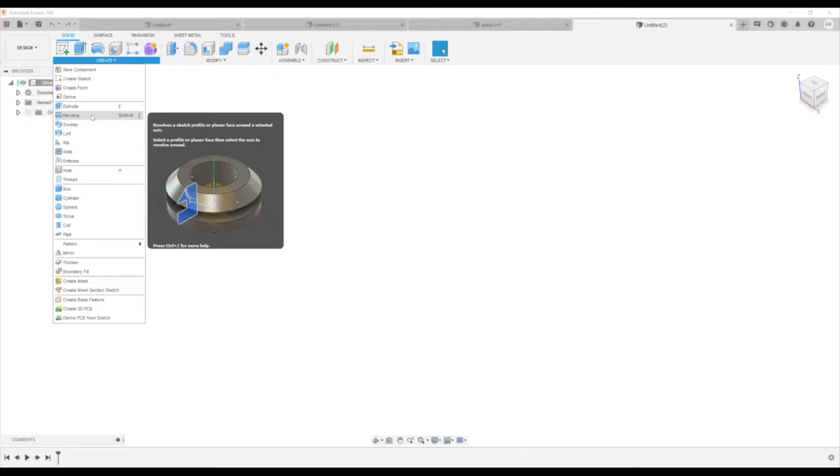Right. So the first principle of stuff for a glider, right? So you're all making gliders. So the first principle is that you're probably going to need to use the lofting tool. So we're going to spend a lot of time on the lofting tool today. And I'll start out real basic. So in my workshops so far, if you've been to them, we've probably done extrudes, revolves, and maybe just those two. Maybe we've done a sweep, but I don't think we've done a loft yet.

And a loft is a pretty unique tool, and it's meant to be used when you can't get the form you want from basic tools like extrude and revolve. So let me show you quickly how it works. So the quintessential case for a loft is when you want to make a circle that turns into a square. So I'm going to show you that right now. So we're going to make a circle. And I'm not going to do dimensions just because it's for demonstration here.

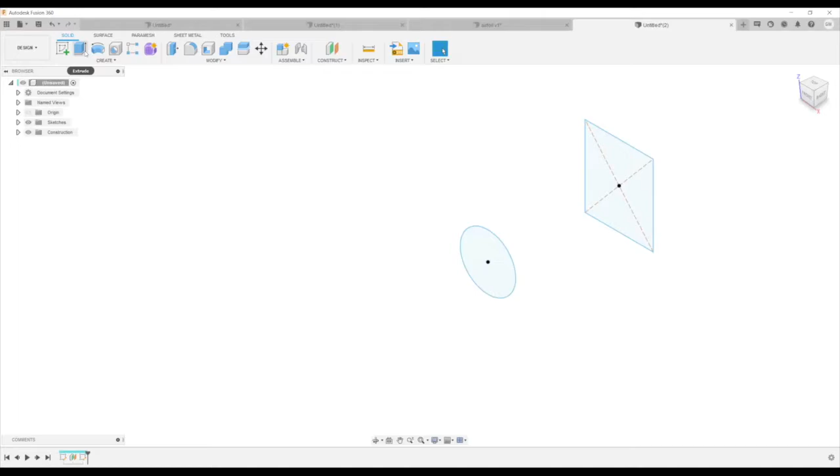I'm going to make a construction plane that's farther out here. And then I'm going to make a sketch on that new plane. And I'm going to make a square, or rectangle-ish. Seems good. So if I wanted to basically make a form that starts as a circle and merges into a square, extrude would not work, revolve would not work, and sweep would not work. Because sweep takes a constant profile and sweeps it along a path. Think of making a pipe or something. So it doesn't change form.

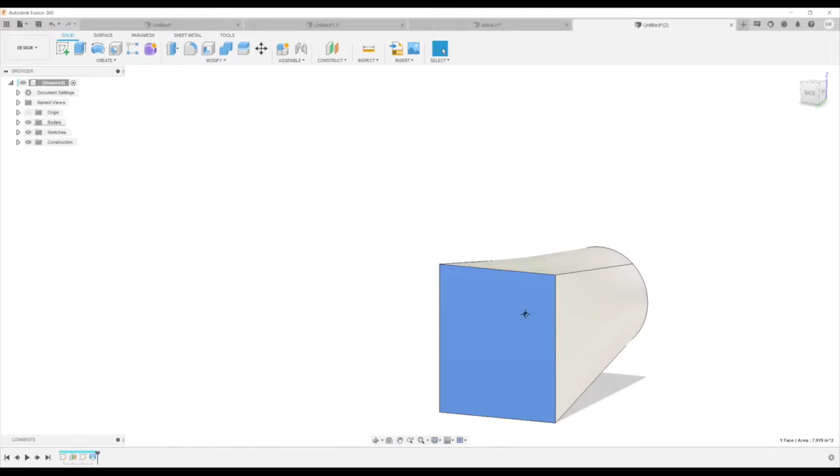Loft is the only one that allows the form itself to change as it goes through different profiles. So we're going to click on the loft here, click on the two profiles, and it's going to connect them with a solid body. So this is the classic example of a loft, right? You're having a circle that turns into a square profile. And this is really a great use case for a loft. So you can think of a loft as the tool you'd want to use whenever you are bridging together multiple profiles that are different.

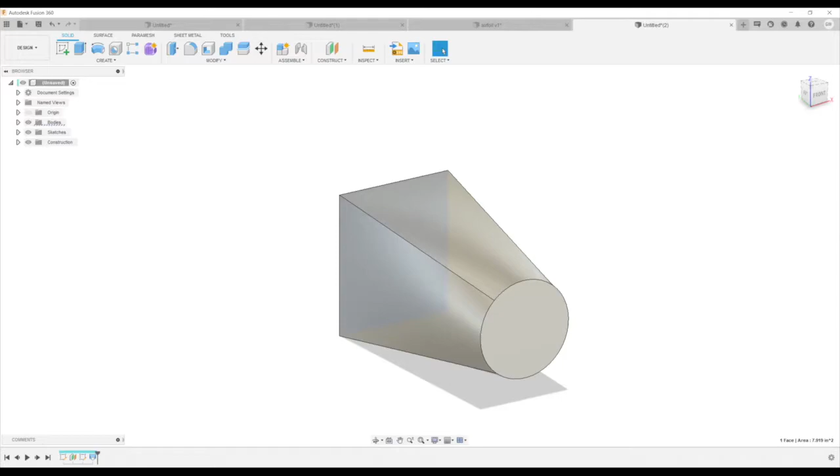So if you have a profile that's consistent throughout, then an extrude will be fine, or even a sweep. But if the profile is changing, you'll want to use a loft. And if you think about an airfoil or a plane wing, right? Those profiles change as you go down the wing or across the profile. So loft is really the best tool for that job. And we're going to go through how to do that today. But just from a very basic high level, this is what a loft does. And I'm going to show you another example here.

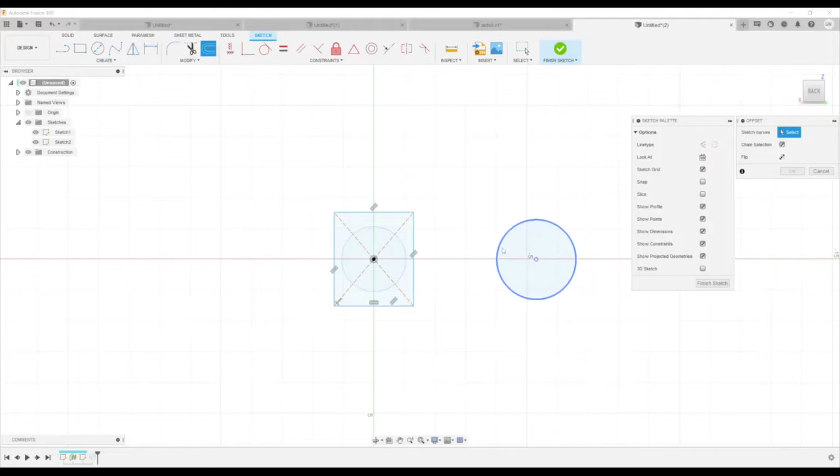So let's go back. Let's make a different sketch. I'm going to leave that one there, but I'm going to make another circle out here just to show you a different example. And then we can go and edit our second sketch. I'm going to take this and I'm going to offset it. Oh, sorry. First I have to project it. So I'm going to project it into my current sketch. And now I'm going to modify, offset. So I'm going to take the same one and maybe make it smaller or bigger. And just like that, I can get out and do a loft now between those two.

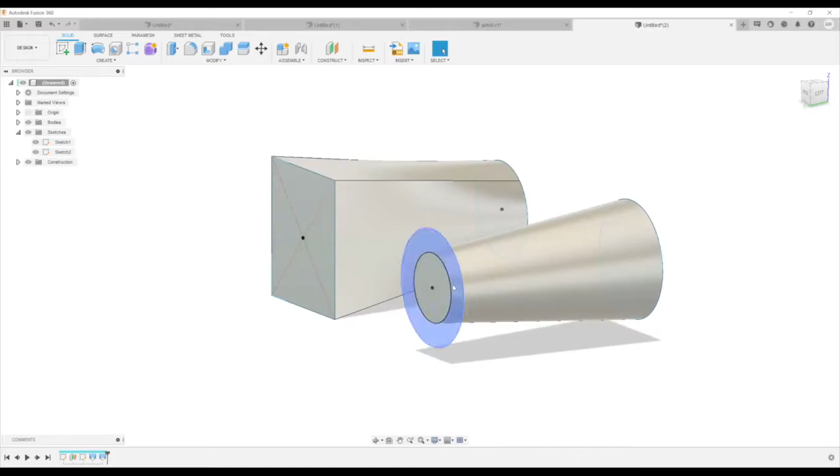So I start with this sketch and I'm going to go to this smaller sketch. And the cool thing about this is that this is now an offset from this main sketch. So I can pull this out, it's going to update, and it's going to keep that offset constant. So if I make this smaller, the offset is going to stay constant and change as a result of this sketch, since I projected it off this sketch. So this is another way you can use loft. If you want it to go from one diameter to another diameter, and you need to specify those two diameters and also the distance between them, loft is a really great tool for that.

Okay, I'm going to do one more example here. So we'll keep going to the side. So that's with a spline. I don't know if we've used splines much in my workshops, but a spline is probably the least parametric tool in the parametric sketching workspace. When I say parametric, I mean that it can be controlled by equations, by dimensions. And splines are a sketch tool, but they're really hard to control with dimensions.

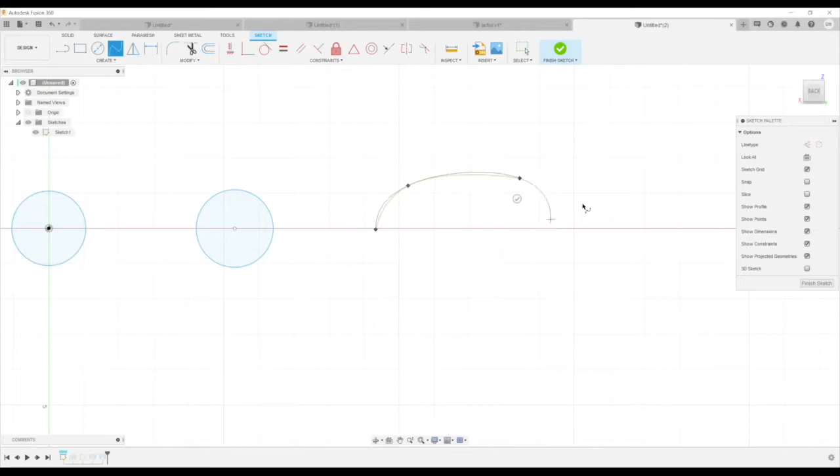You can see I'm making just kind of a free form thing. Right? And anything I do here can move. So I can pull this up, I can pull it down. If I click on any of these points, there's this green line, that's the tangency control. So I can make it more tangent. I can bring this out to expand the tangency. So you can see why these are hard to dimension, right? They're sort of meant to be more freeform. So I'm not going to dimension it right now.

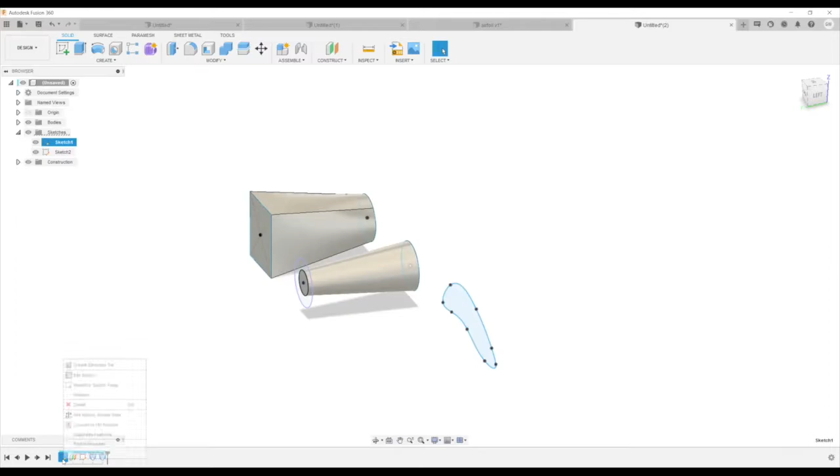But I just want to show you this is another kind of form that can be lofted. Before I was doing two planes, right? So I made another plane out here, but I want to show you that you can also just copy. So I'm doing Control C, and now Control V. Oops, my bad, sorry, I have to be inside the sketch. So if I click this and I do Control C and then Control V, you'll see how it brings up the move copy dialog. And now I have a second one here, and I can move this off the plane.

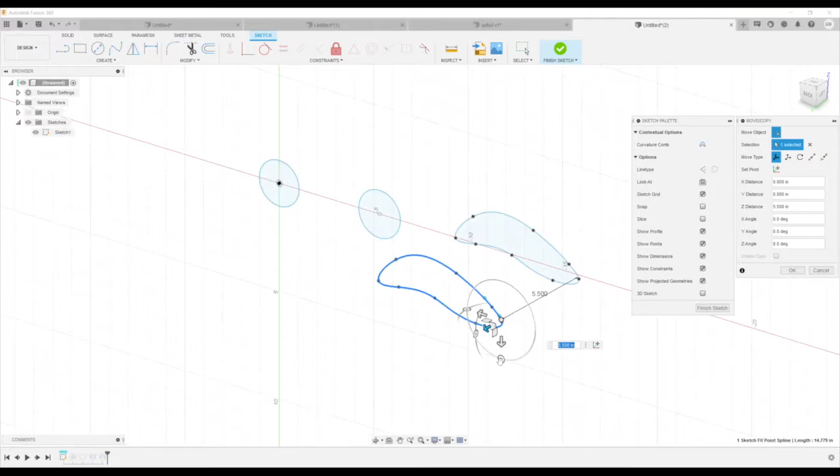So what I did there is I basically made a 3D sketch. I copied and pasted and I moved it off of the plane. And once I'm here, maybe I want to rotate it a little bit to give it a bigger angle of attack. And then what I could even do here is scale it. So I can scale it maybe from the top. I can do like 0.8, so I can make it a little smaller. I could have also done an offset.

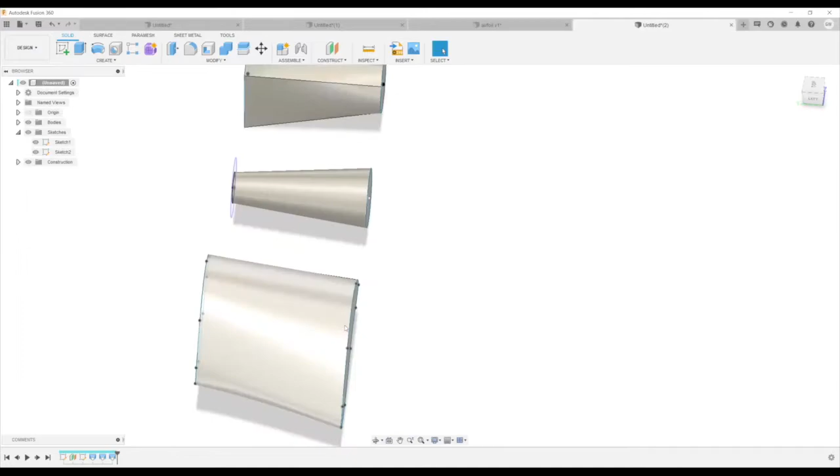And then here I can do another loft. Loft. I'm clicking there. And there I get this kind of interesting shape, right? Because I rotated it's a little bit different. It's smaller. So these are three examples of a loft, three different ways to do sketches, right? The big difference is the first two, I made a new plane and I sketched on that new plane. And this third one, I pulled the sketch itself into space to make a 3D sketch. And then I used those two profiles that were actually in the same sketch.

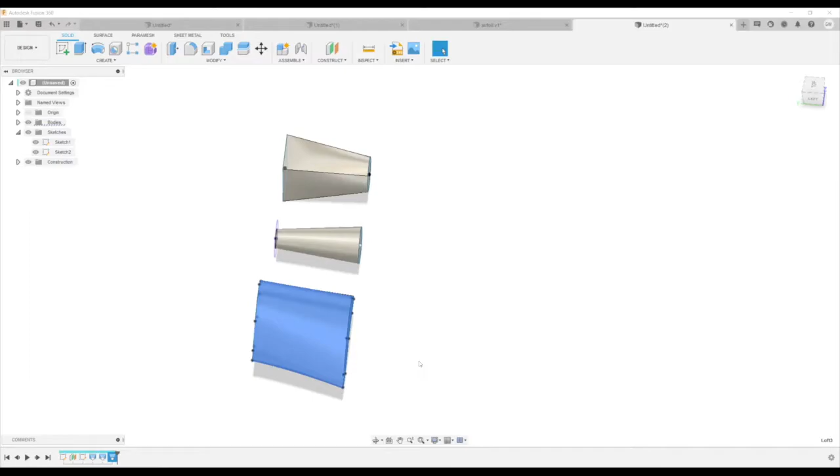So that's the basics of solid loft, and then from there you can do things like fillet. If I click the fillet command, I can fillet these edges. Oops, too big. Let's do 0.5. So I could fillet an edge. You can cut a hole in it. You can do any other tools that you want to use in terms of the solids.

Now, I'm going to hide those bodies and I'm going to show you something else. So we have our three examples of lofted profiles, and we're going to go into the surface tab. This is another area that I don't think we've really talked about yet. The surface workspace is also parametric, meaning that it's driven by equations. But instead of making solids, you're making surfaces. And surfaces are exactly what they sound like, right? You're not making a solid body, you're just making the external faces of it.

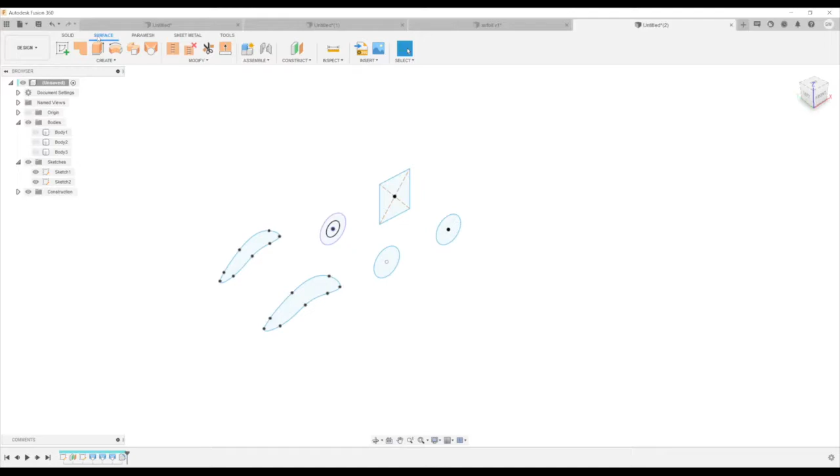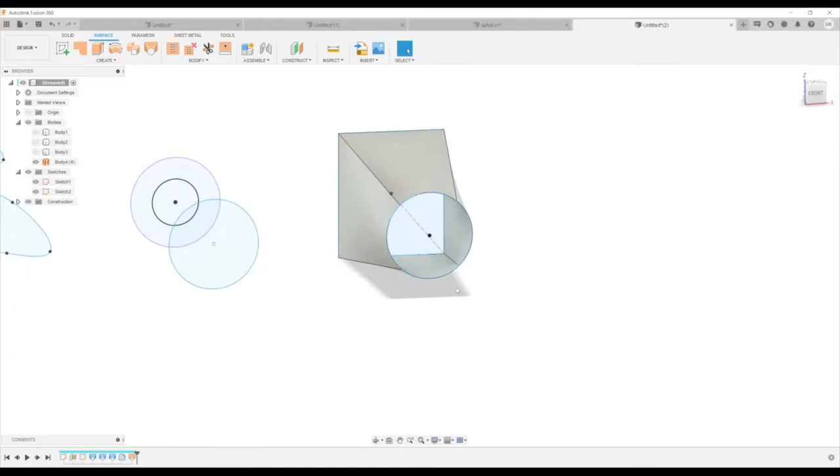So we can see if we do the same loft, let's start with the first one here. I'm just going to select the edge. I don't need it to be a closed profile because I'm just doing the surfaces. So if I hit OK here, you'll see it's actually hollow. I'm going to hide the sketches for a second, right? It's actually a hollow shape. And that is pretty different.

So if we show that first surface body, I'm going to move them actually. I'm going to move the surface body just a little bit over, just so we can see both of them together.

So it's pretty clear what the difference is here, right? We can see one is just a surface and one is just a solid. And there are some real benefits to using both kinds of paradigms, like using a solid modeling paradigm or using a surface modeling paradigm. For airfoils, I tend to gravitate towards surfaces because you can control things a little bit finer.

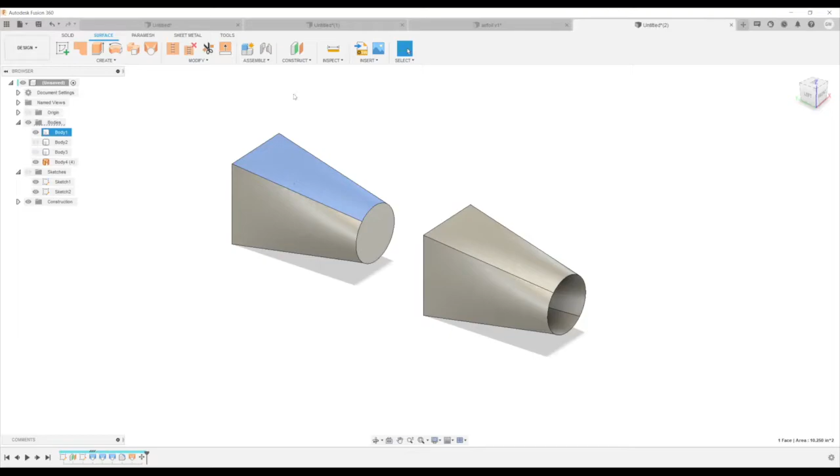For example, let's say I wanted to get rid of this face on a solid and make that face something else. That's kind of hard to do. I'd have to make the thing I wanted this face to be first, and then it would transform into that. So maybe I would extrude this to be taller. But on a surface, I can literally just click the delete button, and it's going to delete just that surface. And then I can reform that surface.

For example, I could do another loft here and just loft from this edge to this edge. And now I'm reforming that surface. So that's the usefulness of surfaces: you can treat each face as independent and modify them with a lot more control because you don't have to worry about editing the whole body at once.

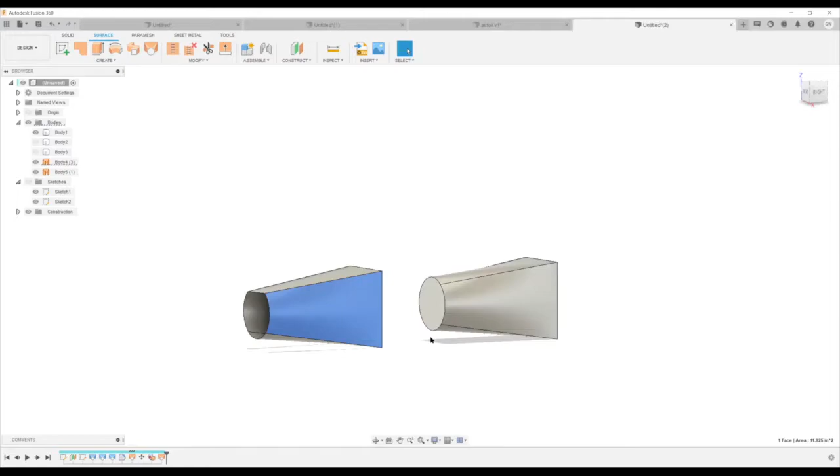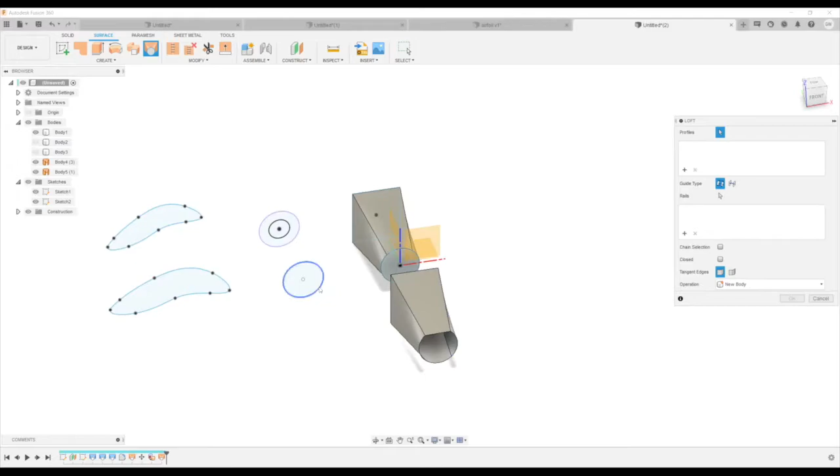Okay, I know there's some questions, but I'm going to finish this section of the demo and then I'll get to the questions. I'm just going to do another surface loft of each of these just to show you. Whoops. Cool. And then one more here.

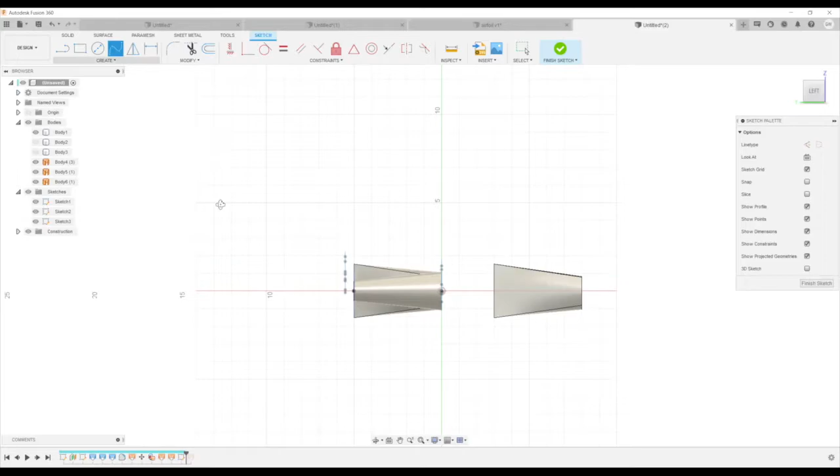The same idea. A couple of things about these lofts that we haven't talked about yet: the main one is called a guide curve. If we go back before this last loft, we can see that if we just do a straight loft, it's going to make the shortest distance between the two curves. Let's say I wanted to follow a different path. I'm going to make a sketch. It doesn't really matter what plane I pick.

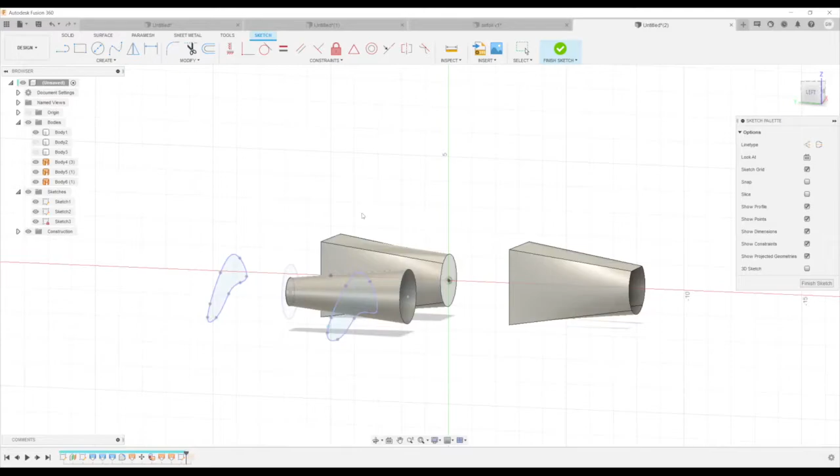I'm going to click on both of these, go under Create, Project/Include, and hit Include 3D Geometry. That pulls those 3D objects into my current sketch. If we hide the original sketch, we can see they are in my current sketch, sketch 3, as 3D objects. And now if I do a spline, my plane is actually back here, but as soon as I hover over these objects, I can snap to them. So right here, I'm snapped to it.

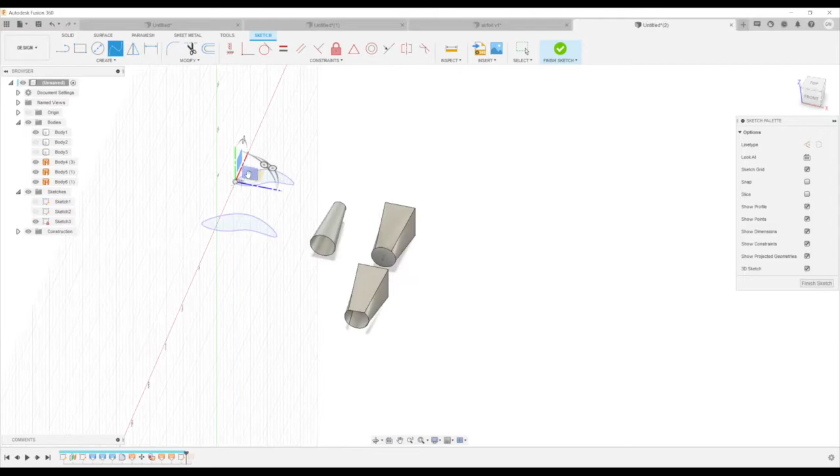Maybe I'm going to do a 3D sketch here. So I clicked 3D sketch on the side. I'm going to click over here, and then I can click on these planes to tell my mouse where it's moving in 3D space. When I clicked on this top plane, my pointer is in this top plane, so if we go this way, it's stuck on that top plane. If I click on a different plane, now it can move on this front plane. So that's the way to control 3D sketches.

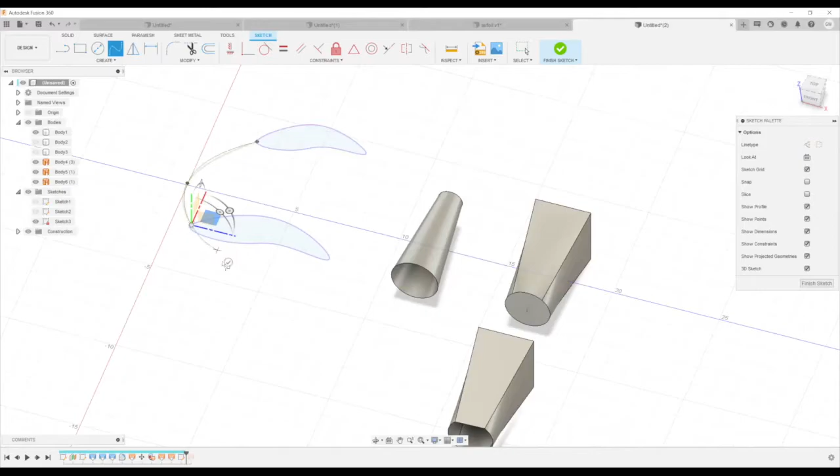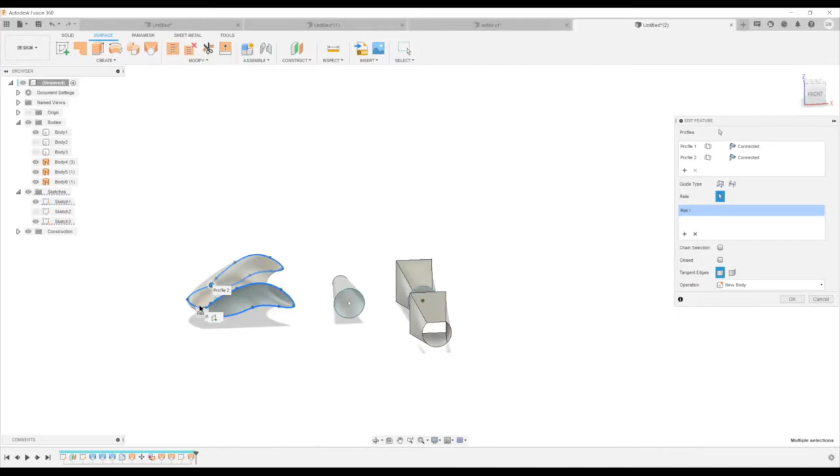But I just want to keep it simple here. I'm going to now anchor it to this other part. So I'll show you what I did: I just made a 3D sketch that connects the two right there, and we call that a guide curve. Now if we go back to that loft and click edit, we're going to add a rail. I add that rail, and you'll see how the form changes. The rail pulled the loft to one side.

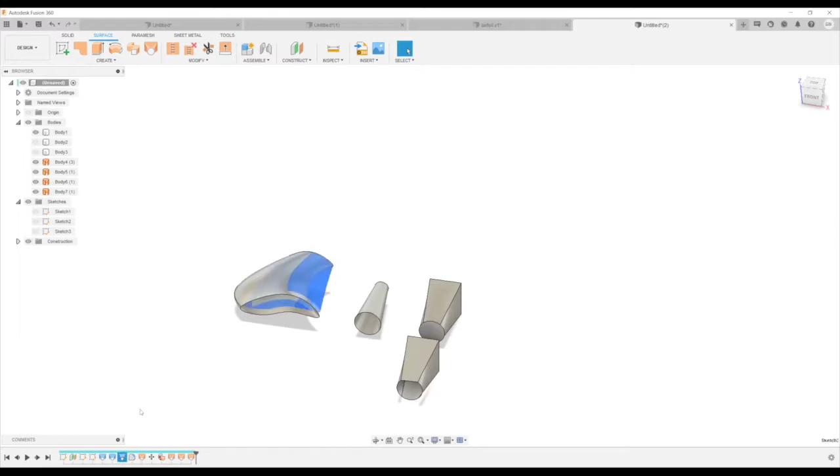So that's how rails work, and you can have multiple rails. If I wanted that on the other side as well, I would have it bulging on both sides. Rails can really pull your form one way or the other. And you can do rails with solids as well as surfaces. Let me pull this sketch to before. Now if I edit this solid, I can also add a rail, and it does the same thing. Now I have the solid with a rail. So rails are pretty useful.

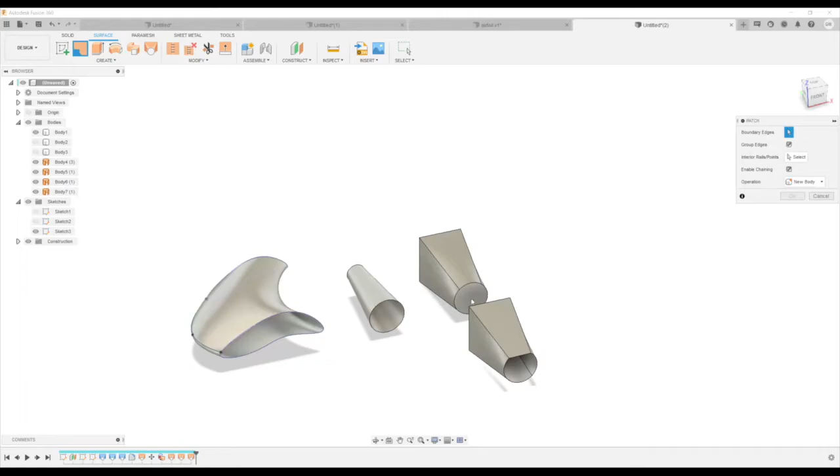Now with surfaces, all of these surface bodies, I can't do the fillet the same way, but I can use other tools. One I wanted to show you is the patch tool. What a patch does is it takes a chain, an edge, and puts a patch on it. You can see it just makes a flat surface there. So there's one patch.

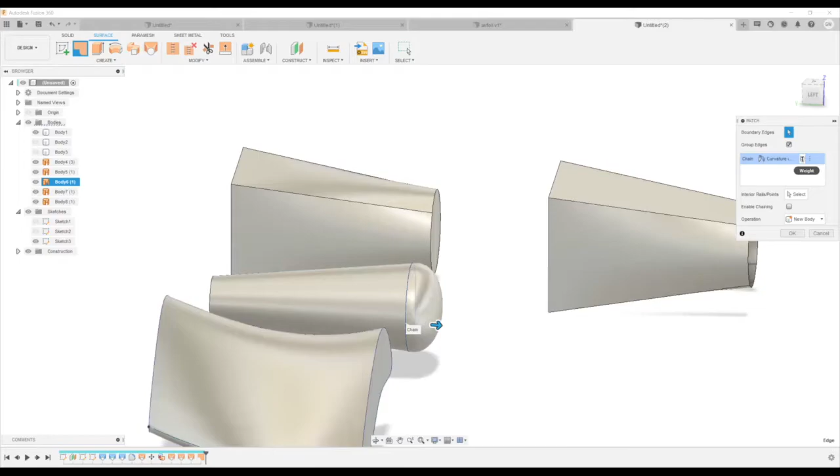And if I do the same thing here, this one, it's on a conical surface, and you can see I can make it a connected patch, which is flat. I could also make it tangent, which will put it tangent to this surface. And I can also do a G2 curvature, and I define the weight of that. So maybe I want to make it 0.8, which will pull it out even more.

And then if I do that on both sides, so I'll just do another simple patch on this side. Now I actually have a surface, and then I made 2 more surfaces on the back. And I can actually stitch all of these together to make a solid. So that's the stitch command here.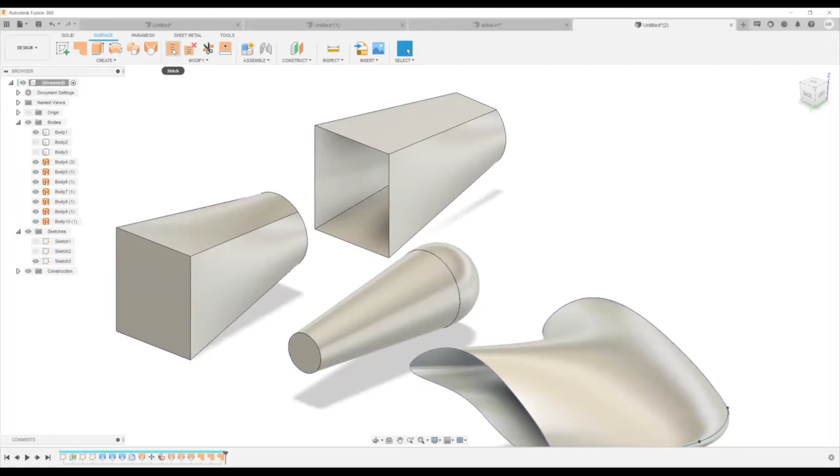So if I click these 3 surfaces, you'll notice there's a green line between them. And as soon as I hit OK, right, there's body 6, body 9, and body 10. It's going to form a solid body, which is body 11. So you can turn surfaces into solids by capping all of the open edges and then stitching them together.

And the same thing with a solid. I can take a solid and turn it into a surface by unstitching it. So this command called unstitch, if I select this body and I unstitch it, now it's a collection of different faces. And those are in your timeline as well, so you can delete them or go back or whatever. But that's how you would get from one to the other.

Yeah. So that's what I wanted to show you for kind of high level lofting. So I'm going to look at the questions now, and then we're going to go through a more long form example of an airfoil. Okay, so the first question is, how does one determine a cross-section shape of wing anyways?

Do you wing it? Haha, good one.

So that is a good question. Airfoils and ideal airfoils are usually determined through computational analysis. So like when I was an undergrad, I did it through a program called COMSOL. I think ANSYS can also do it. Autodesk CFD is another product that can do it, that kind of tests out these airfoils and tells you how to make them better.

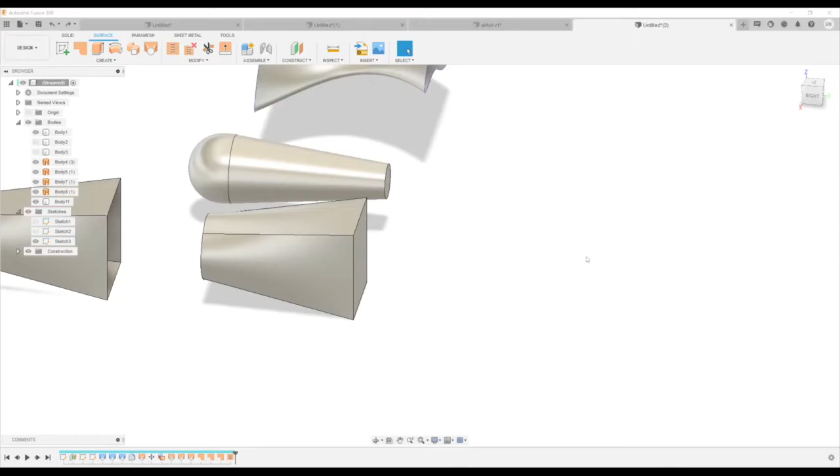Yeah, so there's a website called airfoiltools.com, and it basically gives you profiles of airfoils. So if you hit airfoil search, I'm just gonna search all of them. So you can see there's a ton of different ones. So like this one's kind of interesting. So if we just click the first one, it gives us a profile of the airfoil, and it gives us a bunch of

charts of the airfoil. So CL is coefficient of lift, I believe. And CD is coefficient of drag, and alpha is the angle of attack. So it's basically giving you plots of how it's performing. And then it also has some data up here. I'm not like an airfoil expert, so I'm not sure quite how to interpret it.

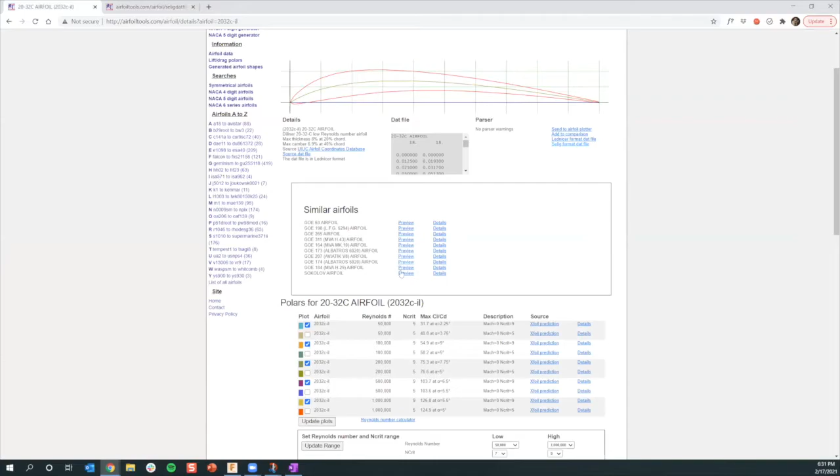But I do know that the DAT file is basically a list of coordinates of the plot of the airfoil. So it has a point at 1 and then 0016. And then from this data, Fusion can take it and make a sketch. So that's actually what we're gonna do next. But that's how you would figure out, if you didn't want to make your own airfoil, you can kind of search a database and get data for the airfoils that you want.

Okay, second question is, for surfaces, do we need to start from a solid body, or can we start using surfaces from scratch? You can certainly use surfaces from scratch. So when I made these surfaces, I actually didn't start with a solid. I started with sketches. So I lofted sketches into a surface body. So you do not need to start with a solid. You just need to start with a sketch. Same as anything.

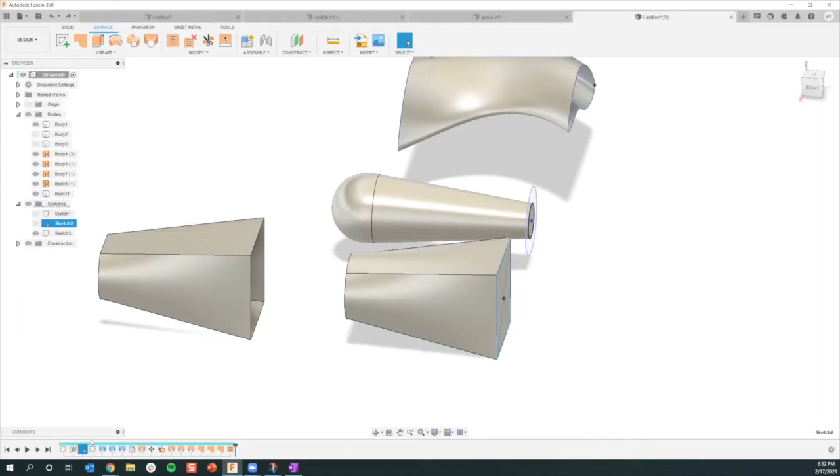Probably the easiest way to make a surface is you would just make a sketch. Let's see. Where's the origin? Yeah, so let's just make a sketch here. Doesn't really matter what that sketch is. There's my sketch. And then I can use the patch tool, and I just click patch. And now there's a surface that is that profile. So all you need to do is start with the sketch.

Okay, so I'm going to go through kind of a longer form example about making an airfoil. So we're going to utilize all of these things that we learned about lofts. I only showed you lofts with 2 profiles, but you can have a loft with 100 profiles. So we're going to go through that. When I made an airfoil today, when I prepped for this workshop, I basically started with a canvas. I've never really worked with airfoils or made airfoils, so I wanted a picture to know what I was going off of.

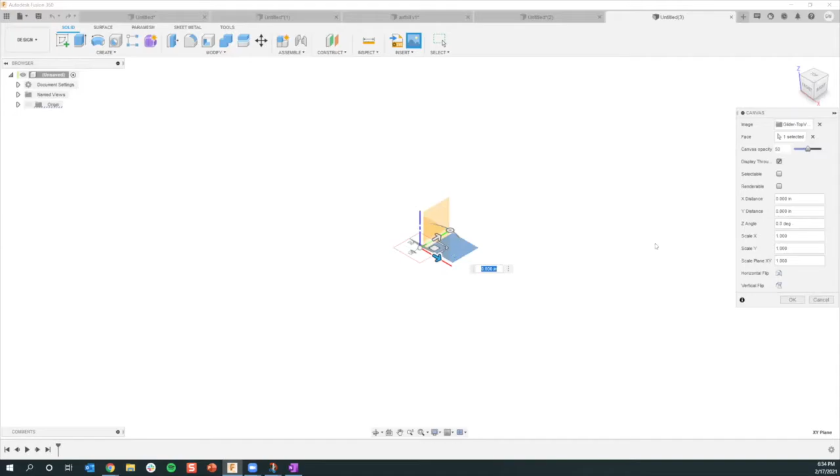So I did something called insert canvas. Under the insert menu, I hit canvas. And all this is just an image file. It's not a vector file. I can't use any of the lines on it. I can't use any of the images on it. It's literally just for reference. So I'm going to go on my computer. I have a folder called decals and canvases. Glider, top view. So I'm going to put it on the top, and I'm going to hit OK. You can see there's that glider, right?

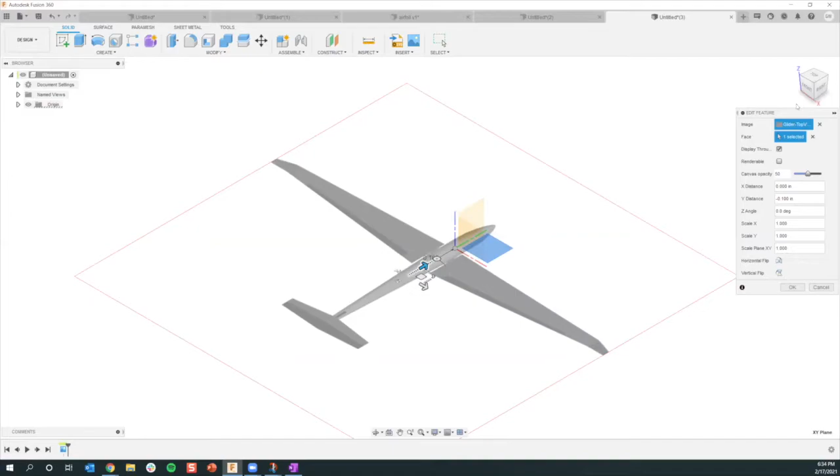Cool. So that's good. I think I want to move it a little bit. So I'm going to hit edit feature, and I'm just going to move it down so that the origin is kind of equivalent with the top of the wing here. And then the next thing I'm going to do is calibrate the canvas. Right now, this is pretty small. I can tell because I had to zoom in a lot to get to it.

So if I right click and I hit calibrate, what that's going to allow me to do is set a distance. So if I click here and I click here, do y'all know how big your gliders are going to be? What the size is generally? It's probably most likely going to be a volumetric size, that they'd have to be less than a liter in displaced fluid. Okay, a liter. So are we looking at a wingspan of like a foot? Sorry, I'm not in metric mode right now. I'd say like a third of a meter, maybe about 30 centimeters. Yeah. Okay, so let's say it's 30 centimeters.

And I'm actually going to round it up to, there we go. So now it's scaled. So now it's what we want. I'm gonna recalibrate it and just do the closest amount in inches just so my brain will function a little bit better. So I'm gonna say 12 inches. And now I want to move it one more time, so I get that origin where I want it. Okay, cool.

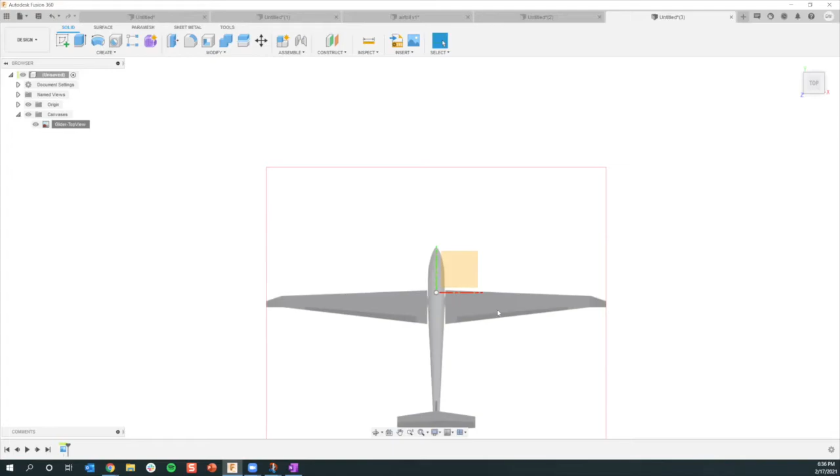So the next thing I want to do is draw the outline of the wing. So I'm going to make a sketch on the top plane here, and I'm going to make a bunch of lines. I'm only going to focus on one side, and then I'm just going to mirror the body. So I'm just going to do this side for now. Okay, so that's the outline. And I also want to do a couple more things here. So I want to dimension it first. So let's kind of do that.

What did I dimension on my other one? I dimensioned this bottom one. So I'm just kind of gonna round it. So maybe 1.2. And maybe I want the total length here. Oops, I want this to be horizontal. Why is it doing that? I want to make sure these are straight.

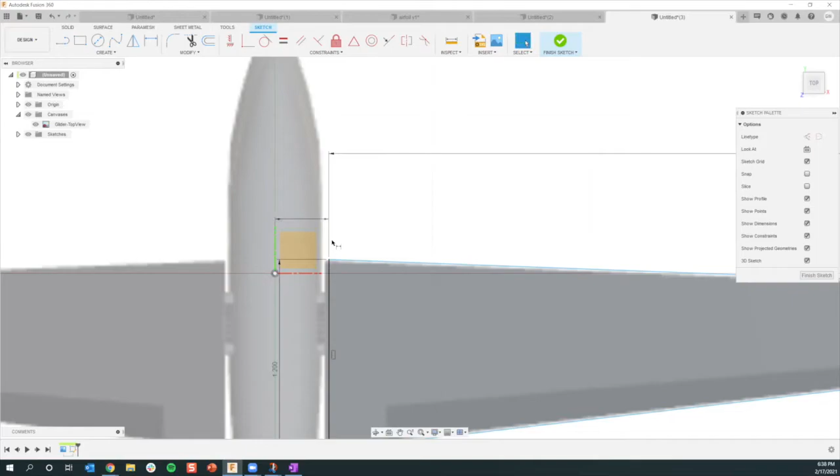Remember, the reason we dimension is because dimensioning shows design intent. So if someone else comes and looks at this, they know what I was trying to do. Also, sketches that are undefined can be moved very easily and then they can be broken. Okay, so that's pretty good.

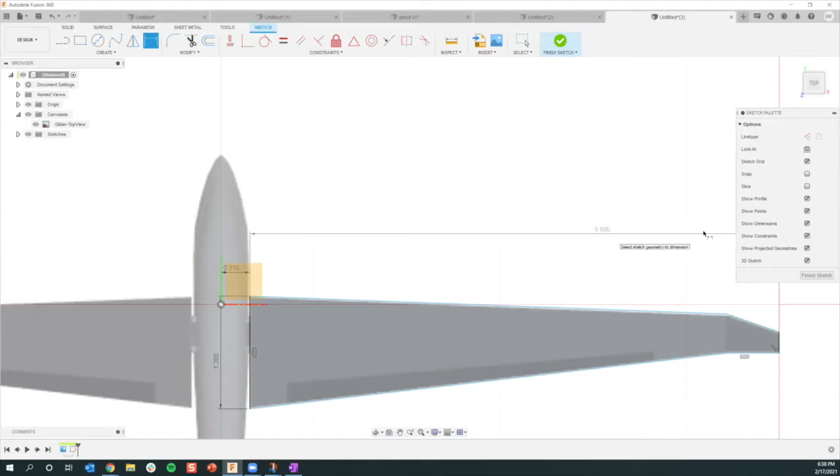I'm going to set a dimension here that's aligned. So an aligned dimension is at the same angle. So it's going to be 5.12. And then I'm going to make this the same as this.

Okay, that's good. And then I think the last thing I need to do is these angles. So I'm going to make that 163, maybe. And then I'm just doing this. I don't have these numbers written down or anything. I'm just doing this based on the image approximately.

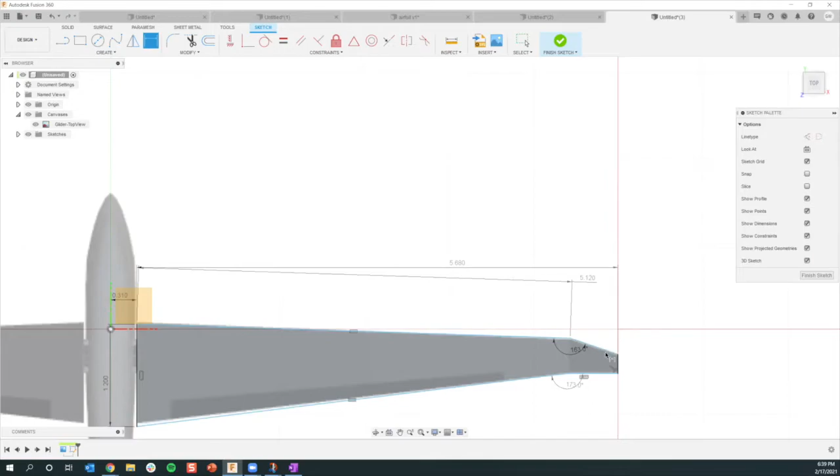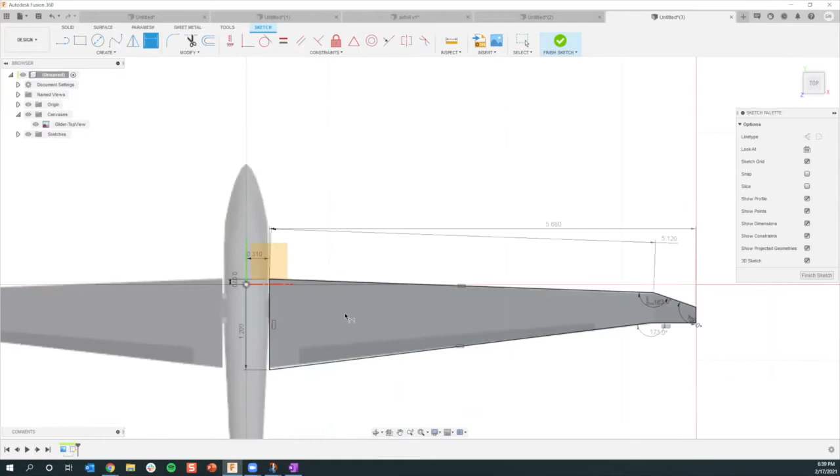Okay, so I'm not sure exactly how this is not dimensioned, but if I pull it, I'll find out. Okay, so I'm going to define it based on the origin here. I'm going to do 0.07. Okay, now it's fully defined. That's great.

So a couple other things I want to do here. We're going to loft this, right? So if I was doing an extrude, all I would need is this profile. But I'm going to loft it. So I essentially am going to want a profile at various points along this wing, so I can loft between them. And the points at which I want the profile, I'm going to define right now.

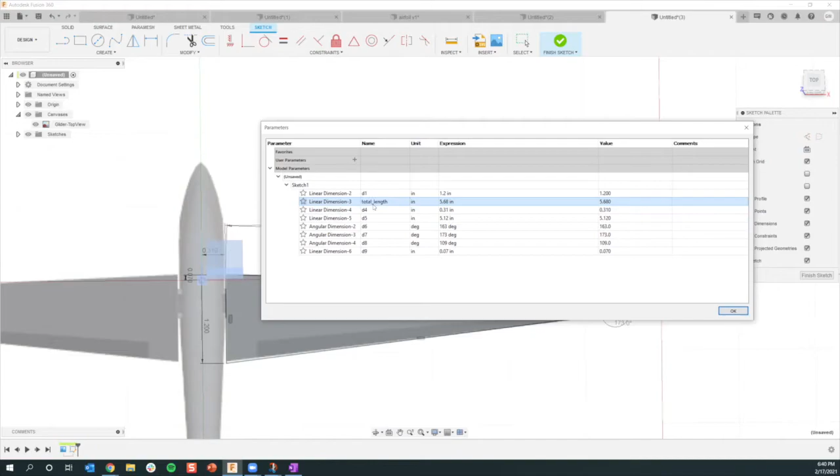So I'm going to do a rectangular pattern of this line. Okay, actually, before I do that, I'm going to find out what this is. So this 5.68, I want to find out what's the name of that dimension. So if I go under modify, change parameters, these are all the dimensions in this sketch. So this 5.68, I'm going to change that to be total length. Okay, so that's important, and I'll show you why.

So if I do create rectangular pattern, I'm going to rectangular pattern this sketch line at the bottom. And I'm going to do it in this direction, which is just perpendicular. And my extent is going to be, the extent is like the total length, and the distance of the extent is going to be total underscore length. So now it's going to end my rectangular pattern exactly at the end right here that matches this dimension. That way, if I change this dimension, the way that my planes are set up is also going to change.

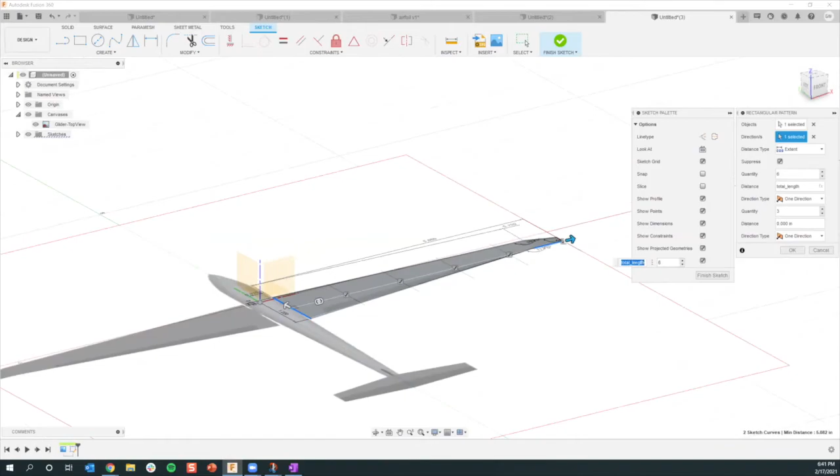And I maybe want, how many do I want here? 1, 2. If I was really doing it, like 10 is probably overkill. Maybe 6, I don't know. 1, 2, 3, 4, 5. Sure, maybe I'll do 7. But you can play around. The more planes you do, the more granular control you have, etc.

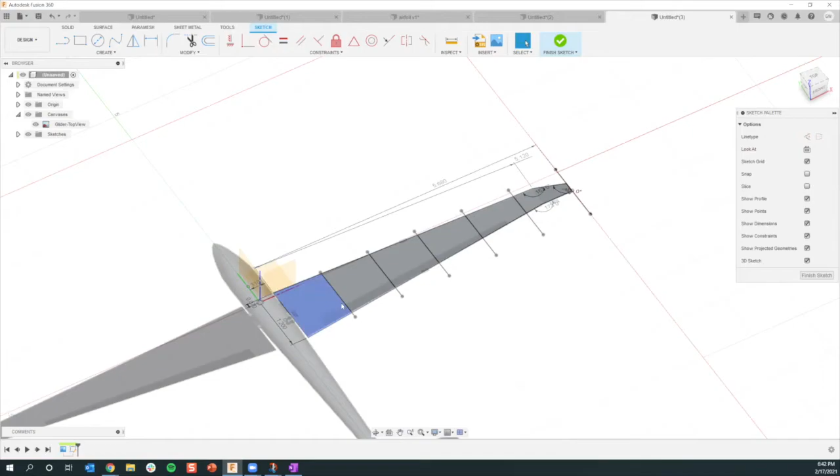So what it did is it made these lines evenly spaced. And what I'm now going to do is get out of my sketch and make those lines into planes. So I'm going to use those lines as reference points for planes.

So under construct, plane at angle, that's what we want. I'm going to click each of those lines, and I'm going to make a 90-degree plane at that line. So I'm going to do that. And if I right click, I can just go up and repeat the last command. So right click, the thing at 12 o'clock is my last command, 90. So I have all my planes now.

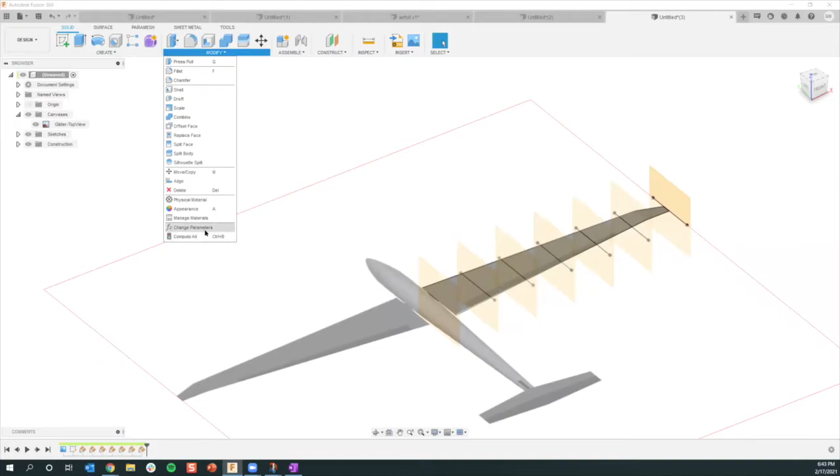That was fairly quick. And I want to show you just the reason we made this parametric. So if we go back to our parameters box, we have that total length, right? 5.68. Let's look at it from this way. If we change that, okay, let's make it crazy for a second.

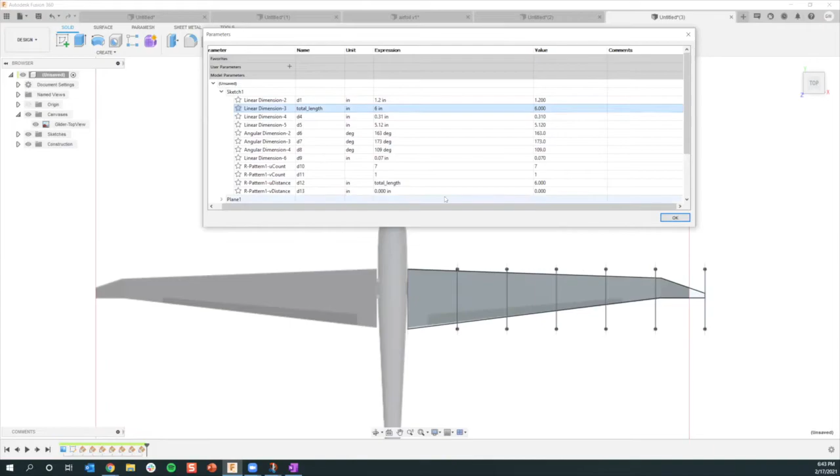If we change that to 7, oh, 7's a little too crazy. Let's change it to 6. If we change it to 6, you'll notice that those planes still are spaced evenly, right? Because we made the planes tied to the lines, and then the lines were equally divided with the total length, right? So it's all parametric. It's all linked back to this total length. We have a lot of control over this, and it's not going to make us redefine anything.

So that's pretty nice. All right, so we have our planes, and now we're going to bring in that airfoil. So let's go back to that. Which one is it? I think it's this one. So we're at this airfoil profile.

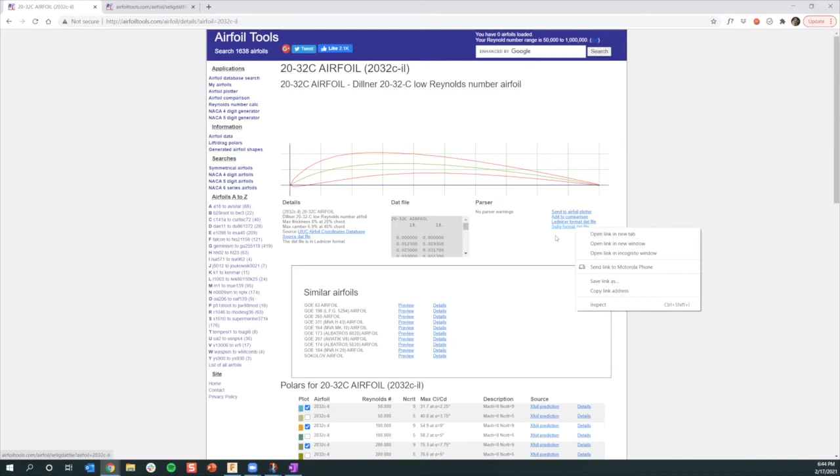So I'm going to right click on this DAT file, and I'm just going to click on it. And then we have this coordinates. So I'm going to right click and hit save as. And I'm going to save this as, I have a point clouds profile now, and I'm going to call this 20-32 C. And then, yeah, I think that's what I want to call it.

Or I'm gonna call it - sorry, my nomenclature here is airfoil and then 20-32C, and then the important part is .dat at the end. I hit save, and then it downloads.

And then we go into Fusion, and I'm gonna use an add-in that I created. So under your tools, you have an add-in, scripts and add-ins.

What I did was I went to the App Store and downloaded this one called Airfoil DAT to Spline 2.0. If I wanted to go to the App Store, let's see if I can do that - so y'all probably don't have that. If you just go under Fusion App Store, add-ins, Fusion App Store, it'll bring you to the App Store and you could search for this app.

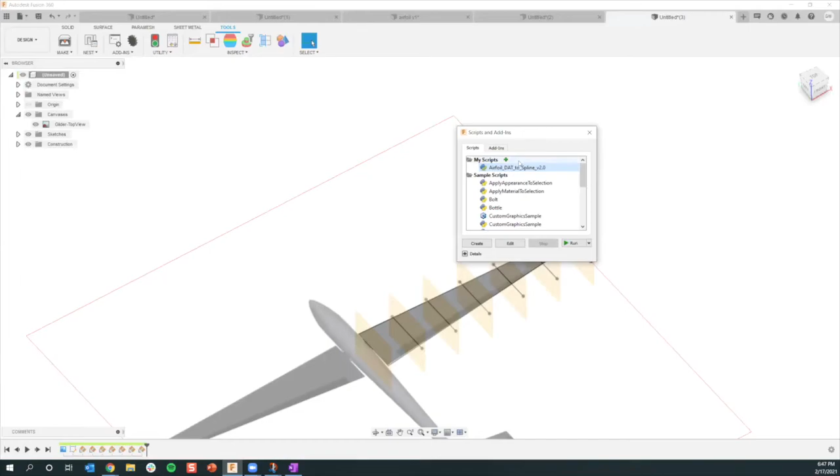Okay, so I'm going to run this script and I'm going to select a construction plane. It needs these planes because that's where we're going to put the sketches. So I'm going to put a construction plane, and I'm going to select a construction plane for this sketch.

And then on the chord is the length of the airfoil from front to back. So you'll see if I select chord, I hit these 3 dots and I'm going to say measure, and I'm going to click this edge to measure. And it gives me that's 1.2 inches. That's great, so it's going to give me that length, and that's going to be the chord of the airfoil it's going to import - it's going to scale the airfoil to have a chord length of 1.2.

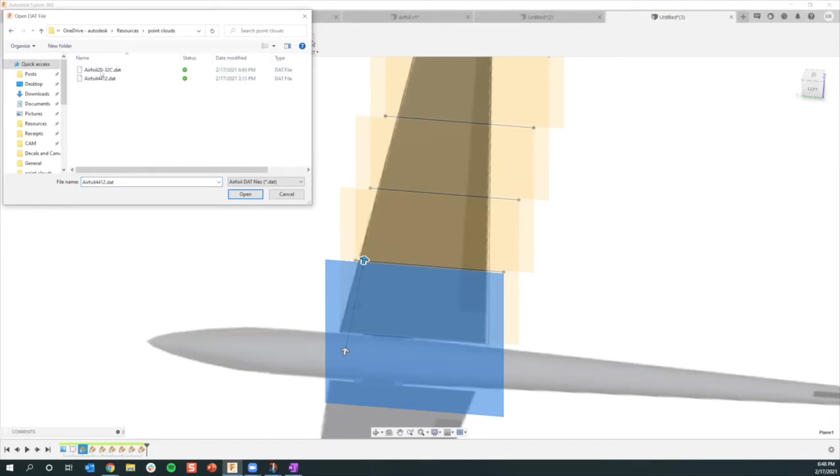Then I hit OK, and I'm going to go and find that airfoil. So that's under point clouds, airfoil 20-32. Okay, cool, so now the airfoil came into Fusion.

It came in a little bit of the wrong place, though. That's okay, so we're going to click on it, go into our solid workspace and hit move. I'm going to do a couple things - the first thing I'm going to do is rotate it about this, I showed the origin here, and I'm going to rotate it about the x-axis, 180 degrees.

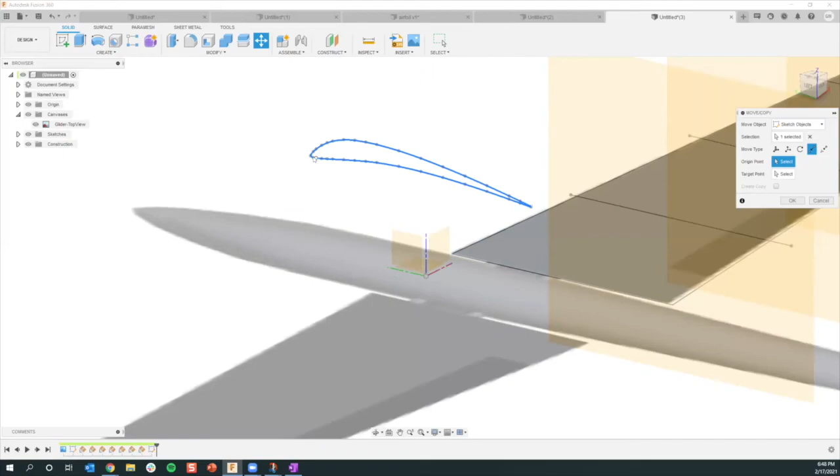And then I want to move it so that the nose of the airfoil is right at this point. So I'm going to do a point-to-point move - this airfoil point to the right there.

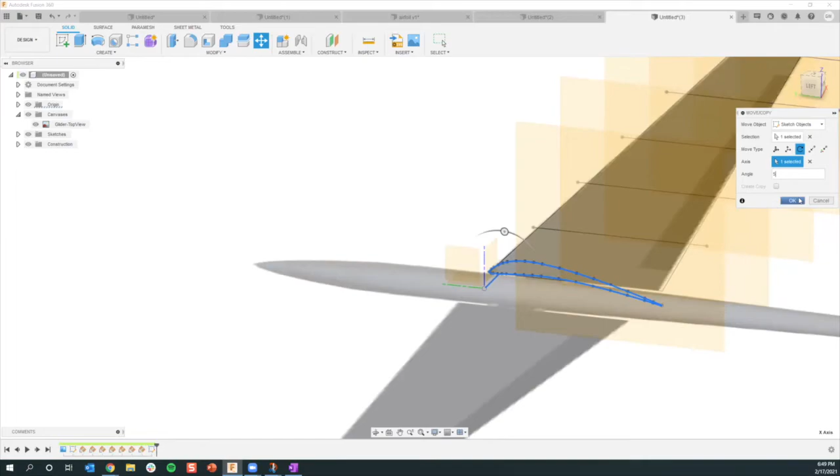Yep, perfect. And maybe I actually want it to be rotated a little bit so the angle of attack is a little higher. So I'm going to rotate the same thing, about X, and maybe I'll just rotate it 5 degrees. Cool. And then I hit OK.

So that's number 1 of the loft. So then we would just do that again - I'm going to do it one more time, and I think I'm going to skip to my completed version. But actually, before I did that, I want to do one more thing in that sketch. So I want to go back into that original sketch.

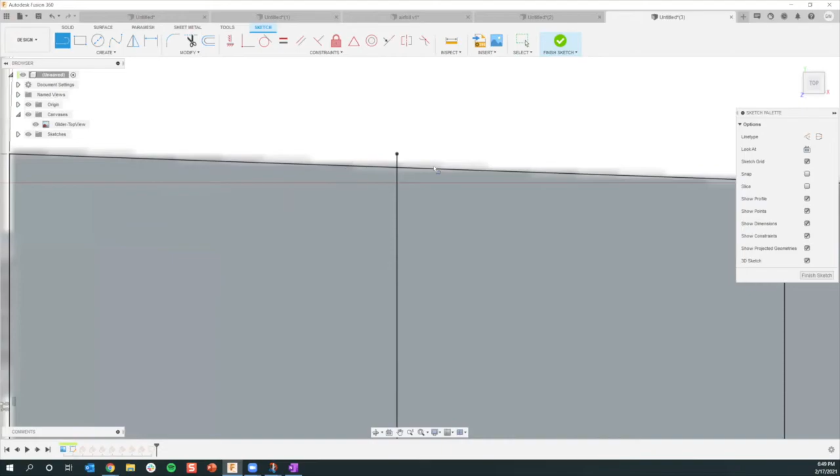I have these lines, which are great, but I actually want to make lines on top of them, because what the airfoil is going to - when I do that airfoil sketch, it's going to ask me where I want to anchor the nose, and I want to be able to give it a point right here. Right now, there's no point at the intersection of this line and the edge of the airfoil, so I want to put a line right there so that I can grab onto something. I'm just going to put lines right there over the existing lines, but then they give me points at the intersections. So that's important.

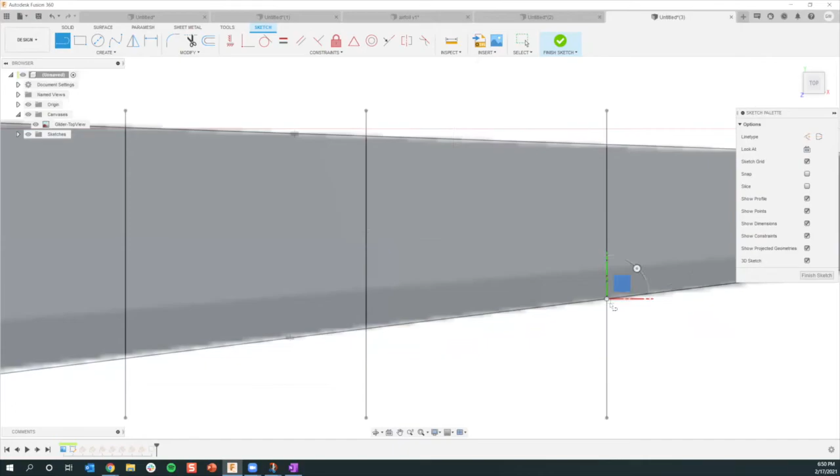Okay, and then one more here. Okay, all right, great, okay. So I'm going to do that one more time here.

So I'm going to go into my tools, add-ins, scripts and add-ins, Airfoil, run it, construction plane here. And then again, my chord, I'm going to hit measure, and that way I can go from that point I just made to the other side here, and it's going to do it exactly that point. Hit OK, going to grab the same airfoil.

It's going to probably pull it in upside down again or somewhere else, but at least the chord length is correct. So let's hit M for move, sketch objects. I'm going to rotate it about X, 180.

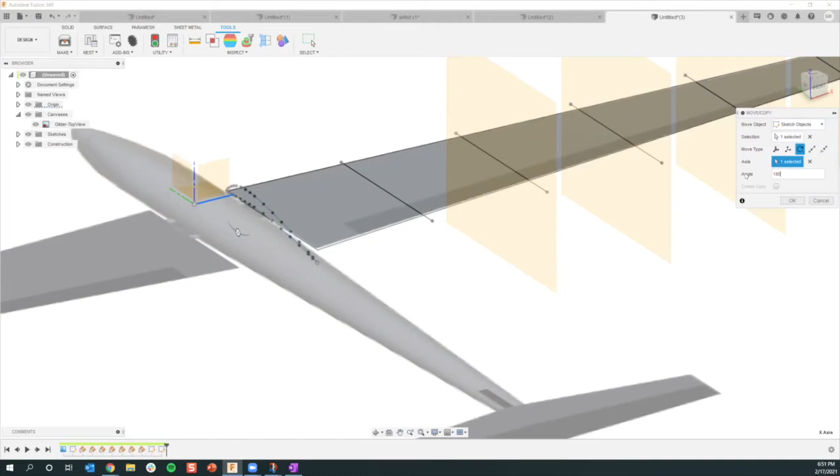Okay, then I'm going to do a point-to-point move. I'm not sure why it's out in space, but again, I'm going to need that point. So that's why I made that line on top of it, because I'm going to need this point at the intersection. And then I'm going to rotate it one more time.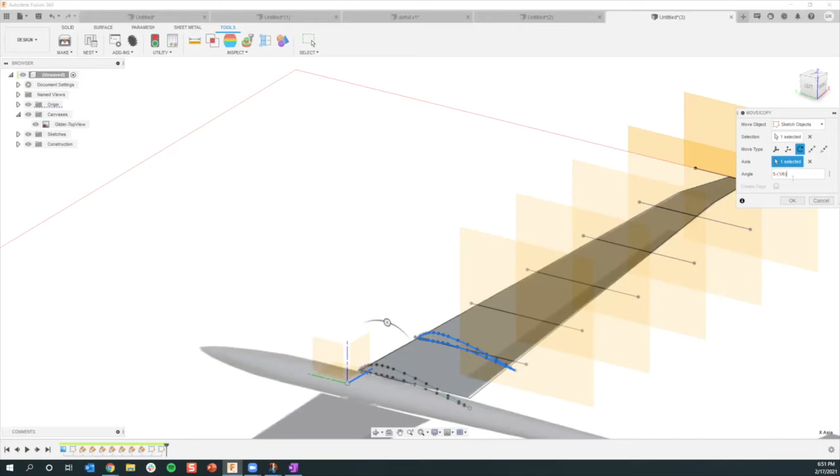So there's 1, 2, 3, 4, 5, 6 - so there's 6. And by the end, I want it to be at 0 degrees. So I'm going to rotate it 5 minus 1/6, and it's going to be a little bit less rotated than the one before it.

So you'd basically go down and do that, using the same airfoil down the line. I'm just going to pop over, I don't want to take our time to do that - we have 8 minutes left, so I'm just going to pop over to this one that I made earlier.

So same thing, and then what you do is you create a loft. So let's go in - this is a solid loft, but you could also do a surface loft.

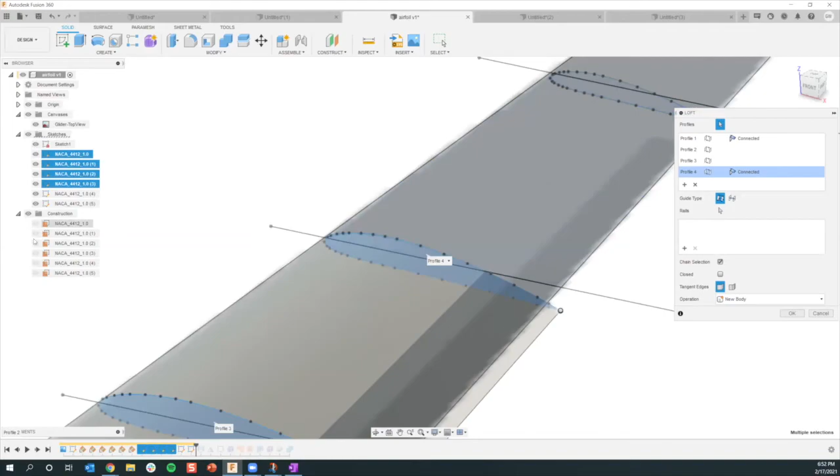So loft, and then I'm going to click all of those profiles - 1, 2, 3, 4. It's giving me a hard time, so I'm going to hide the canvas for a second. There we go.

Oh, wrong profile at the end. Oh no, that's right, okay. So I hit OK, and now I have this - I'm going to hide the sketch now. So now I have this pretty nice airfoil here, this wing.

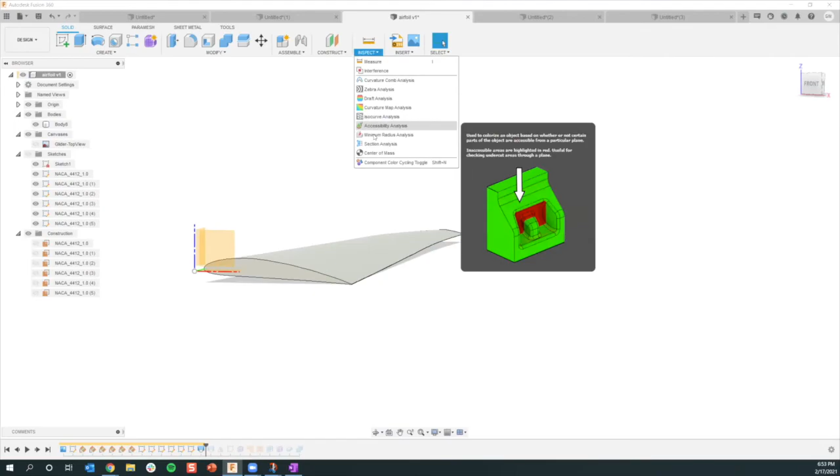You can see how it curves slightly, right? So if we do an inspect section analysis here, and we drag this through, you'll see how it kind of curves up. Or maybe that's better to see over here - so this is the edge. It kind of curves up because we had it rotate less as we went down the line.

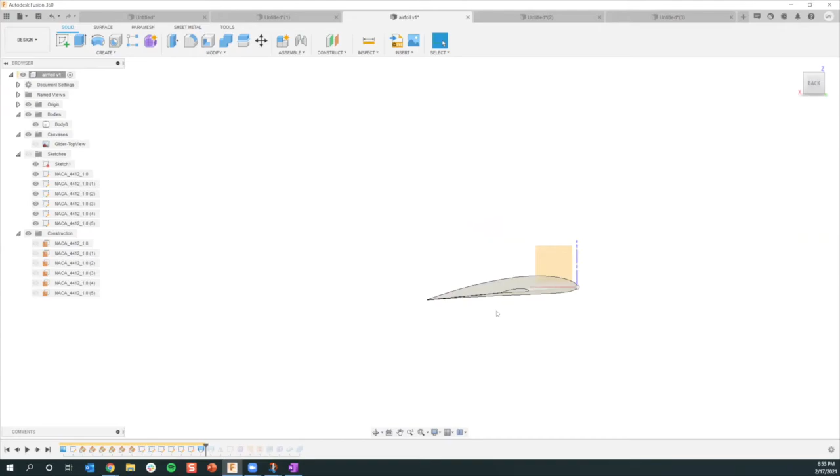And then what you can do from there - I'm going to delete that just because I already made one - what you can do from there is you can mirror it, so now you have 2.

And then what I did, which I will show you how to do - let me hide all this stuff - is I actually wanted to do a loft of the body. So I made a really quick sketch that was just circles. This one I did with just one plane because I didn't need it to be as parametric. So I just made a circle, dragged it forward, then copied and dragged it back, each time reducing the diameter a little bit, and then I was able to do a loft between them.

So I think that maybe we'll stop there. We have another workshop, so maybe I'll pick up here next time and I'll talk about doing this next loft, because we have one more next week. So I think that would be a good topic to finish out.

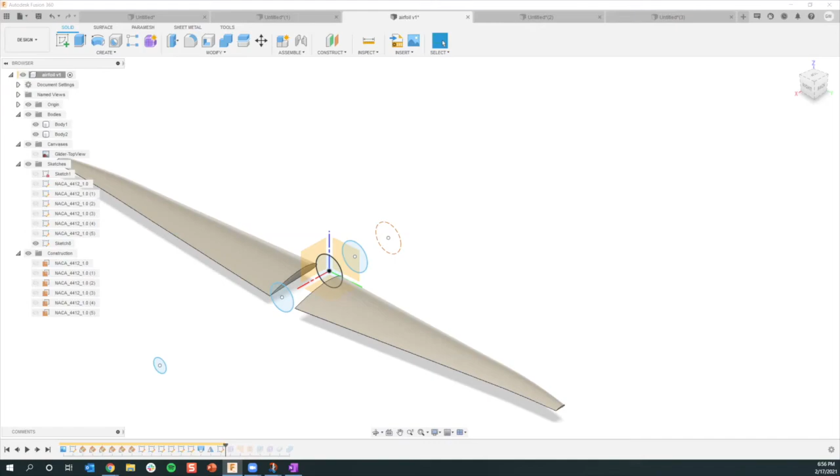Do folks think that they're going to use these modeling techniques to create their airfoils, or is this not the way that they were thinking they were going to do it? Curious. Yeah, personally, I was thinking a lot about how I would create such things in Fusion 360, but I wasn't aware of the features you mentioned today, like the loft and the spline. That makes it way easier. So if I was doing something like that, I would definitely be using it.

Yeah, this lofting technique is what came up when I was first thinking about creating the airfoils. So it's neat to actually see the process and doing it the way you did. Really good. Okay, great. Good.

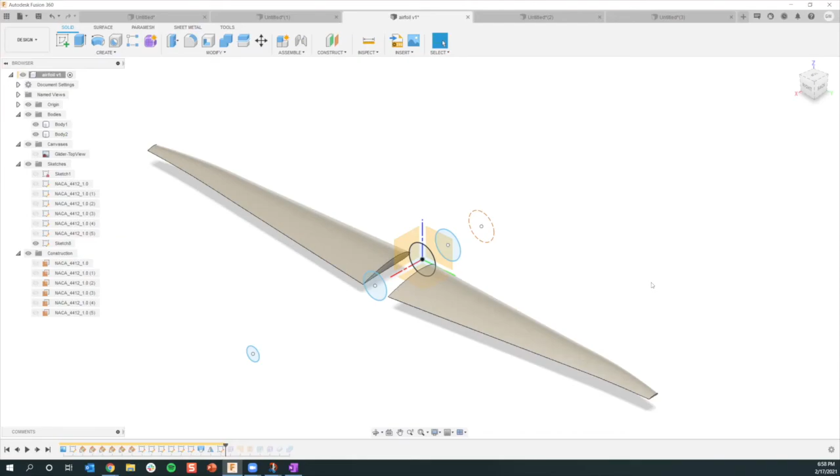So this one I used because I was using the airfoil profile from the website. That's why I made all the planes and I had to import it every time. If I just wanted to do a spline that I drew myself by hand, that would be much easier because I wouldn't have to import it every time. So I would just make a bunch of planes and then copy and paste and drag each one to those planes. So I can show you quickly how to do that.

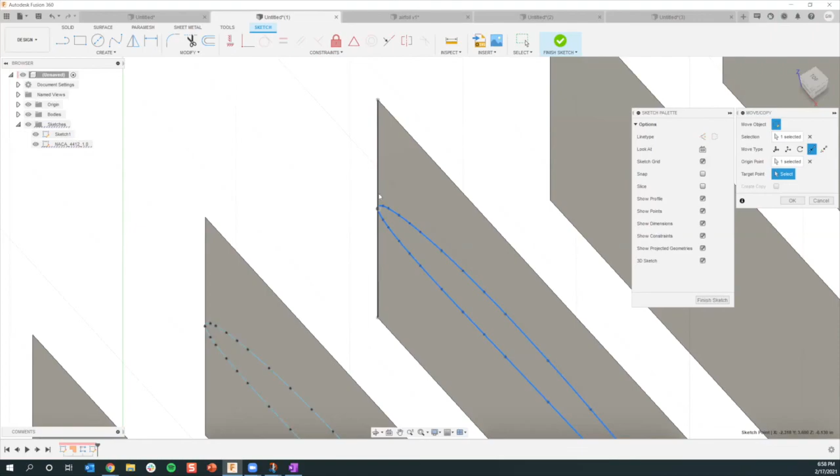So here's an example. Let's say this was just something I drew and I didn't need it to be precise. This is actually another airfoil, but for example, I'm in a sketch right now. Once you're in a sketch, you do Control C and then Control V, and then I'm going to pull the copy out, and then I'm going to do a point to point move. So I'm going to click the best point, and then I'm going to click the middle, I want the middle of this.

Sorry, 1 second. Just did this. Oh, I see. Okay, that's why it's not working. I'm gonna move this down just slightly.

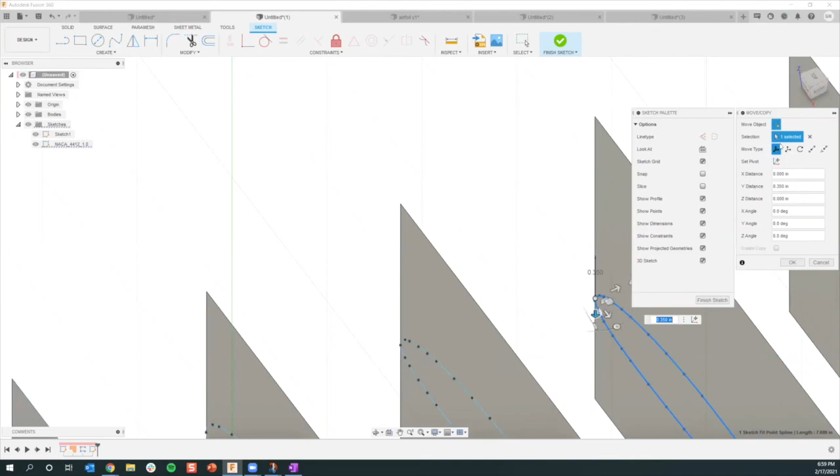Okay, now I'm gonna do a point to point move between this point and the center. The reason this wasn't showing up is because it was already on it basically. And what that's gonna do is snap it to the middle. And then from there, I can scale it. So maybe I want to scale it by this top point to 0.7. And then maybe I want to move it again and rotate it about this y-axis by 2 degrees or something. And now I have that.

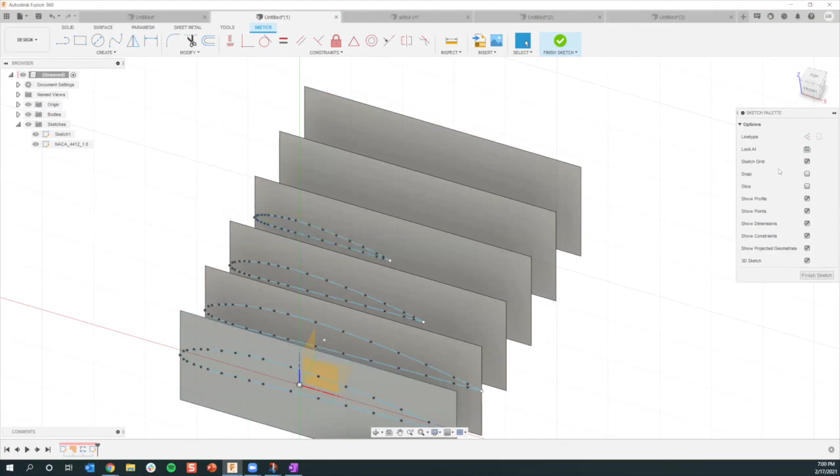So you can also do it by copying and moving it to the place you want it to be and not importing every time. But the nice thing about importing is that you get to set the chord length. The chord length is the distance from here to here. And the only way to set the chord length is by importing it every time using that add-in.

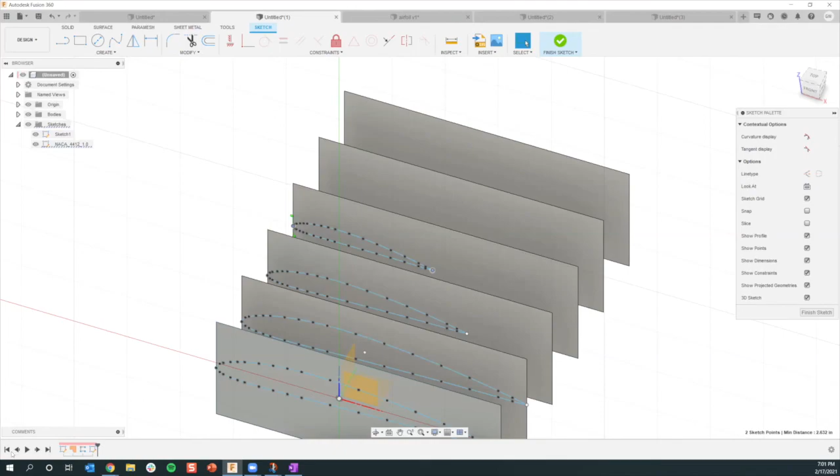But if I don't care about the chord length or I don't need it to be precise, I can just copy and paste it, move it to a different plane, and then scale it. Scaling is a percentage of the size, so it's not going to get me to an exact length unless I calculate it. But this is a quicker way. And the way I did this, you can see it's only 4 moves, right? So in this one, I have to get out of the sketch, sorry.

What I did was I made a sketch here, then I did a patch. This is the patch command. I just made a surface, and then I rectangular patterned that surface. Then I brought in an airfoil, copied it, moved it, anchored it to one of the patch planes. And then I just kept copying and pasting, anchoring it to different profiles. So this is all one sketch, just anchored to different profiles.

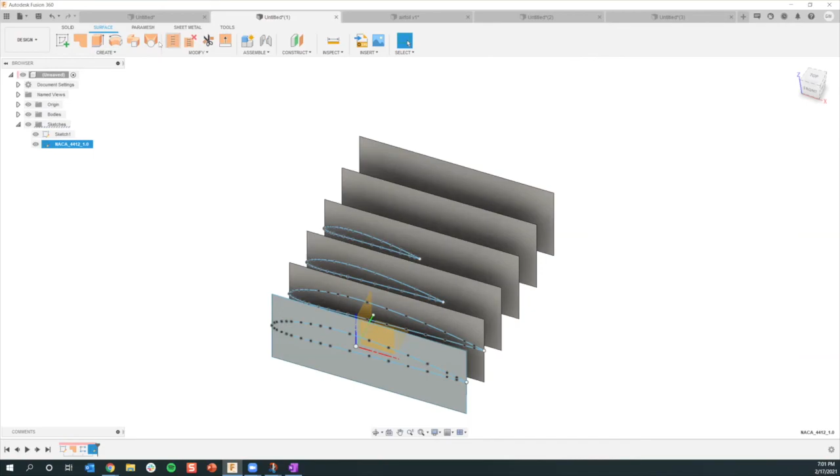And then when I'm done with that, I can just do a loft. I can either do a surface loft or a solid loft, but here I'm just going to do a surface loft. Oops. So I'm going to hide those patch things that I rectangular patterned, and there's my wing. So there's lots and lots of options for how to do this. These are just a couple of them.